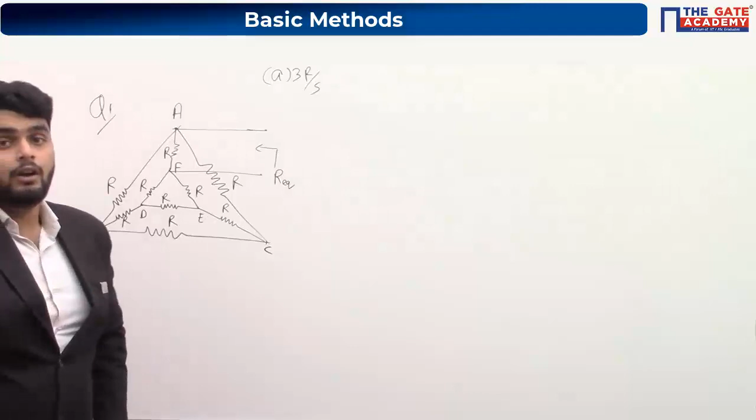In this question, we have to find out resistance between two terminals AF. One option of this is 3R by 5. Okay, fine. So we will solve this question. This is a question of symmetry. First of all, we have to check whether this question is of symmetry or not. For that, we have to draw either a vertical line or a horizontal line.

So I am drawing a vertical line, just as I have done earlier. This is a vertical line. Now you can see, with respect to this line, you will get a mirror image on this side as well as on this side. Yes or no? So that means this is a line of symmetry.

Next step is to identify the line of symmetry. For that, we have to draw the axis of symmetry. And what is the axis? The line connecting the terminals between which we have to find out the equivalent resistance, like this. This is F, this is A. Now you have seen that the axis and the line of symmetry are parallel to each other. That means this is a parallel line of symmetry.

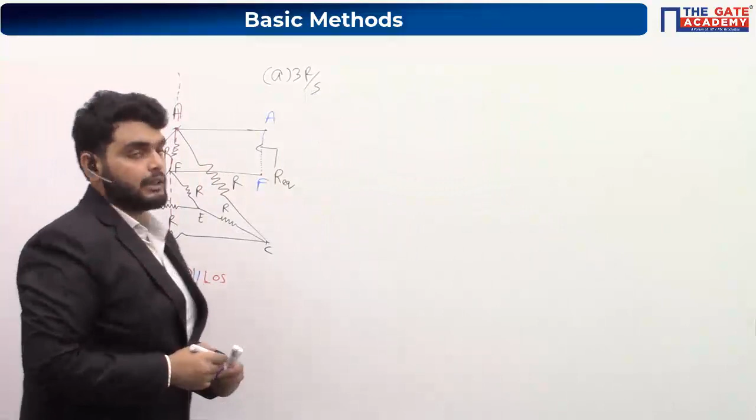Second step finished. Third step: for a parallel line of symmetry, the branches which are perpendicular to it contain equipotential points, and for a perpendicular line of symmetry, the branches which are parallel or on it contain equipotential points. Here this is a parallel line of symmetry, so branches perpendicular to it contain equipotential points. So tell me, what are the equipotential points here?

Okay, DE and BC. The branch DE and the branch BC are perpendicular to the line of symmetry. So D, E and B, C are equipotential points. Now I can either short circuit this branch or open circuit this branch. I am doing the open circuit, so open circuit the branches DE and BC.

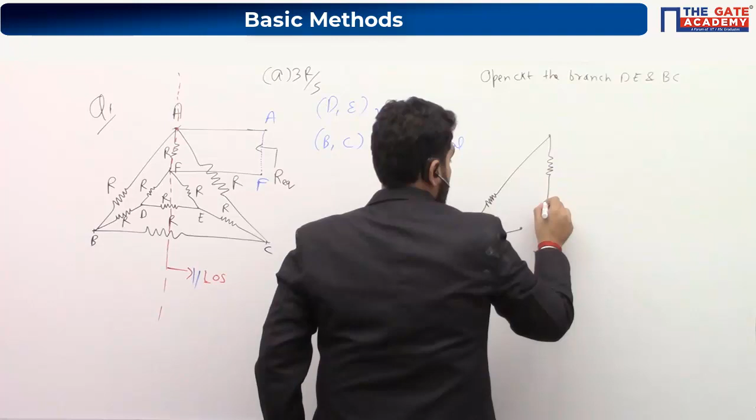I am open circuiting the branches DE and BC. The network will look like this. And this is the axis. This is F, this is A. Now we have to find out the equivalent resistance.

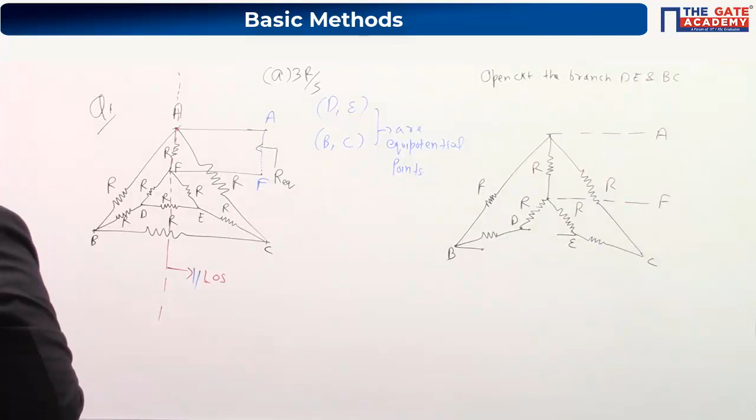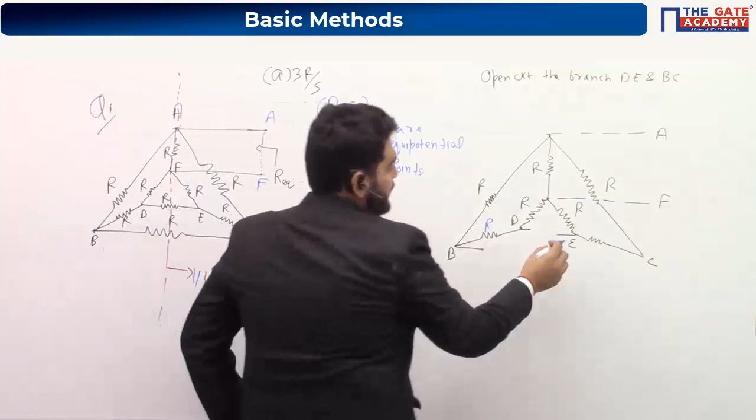You can see these three resistors are in series, right? Similarly, these three resistors are again in series. I have two points, one is A, one is F. These three resistors are in series, so I can write the sum as 3R. These three resistors are in series, so I can write 3R.

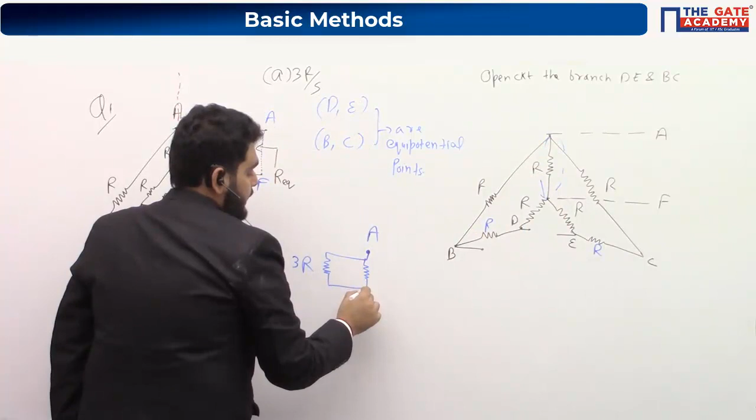Now see this middle resistor; it is between A and F, so again one resistor R, and the series branch again 3R. For resistance between AF, all resistors are parallel, so I can write 1 upon 3R plus 1 upon 3R plus 1 upon R. By solving this, you will get RAF equal to 3R divided by 5 ohm.

So students, this was the question I gave you in the homework in the last class. There was a doubt earlier from one student, I don't remember the name, that we can solve this question with star delta also.

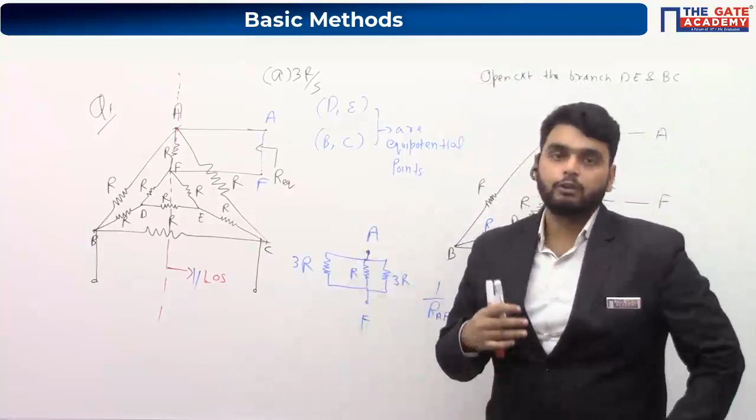So the question that we solved in the last class, resistance between DC, can be solved using the star delta transformation. But if you want to find out resistance between AF, like this question, then you cannot solve it using star delta. Because in star delta, the terminals across which you have to find out the resistance cannot be changed. What does it mean? I will explain it when we go to star delta. Right now we are completing our symmetry concept.

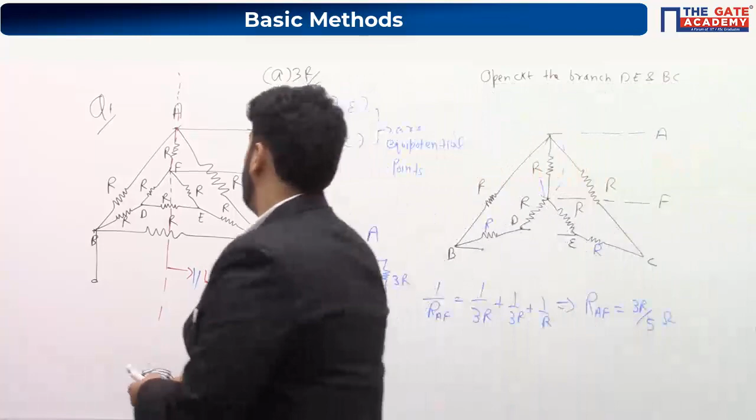So this was the question I gave in homework, and I also gave you one more question in homework. So tell me the answer of that question. Now try to solve this question. In this question, we have a network given and we have to find out voltage AB. This is node A, this is node B. And 1 ampere current is entering from node A. So in this, we have to find out voltage AB.

Carefully do this question from the start. Don't skip any step. Step 1, step 2, step 3, step 4. For every theorem, for every analysis, I will give you the steps. So whenever you practice questions, do all the steps. Even though you know, don't skip any step. In the exam, you can skip steps to save time. But during practice, don't skip any step. Otherwise, in the exam, you will get confused.

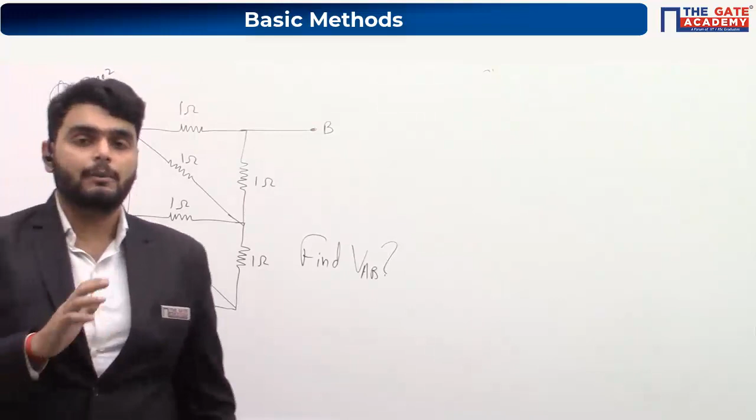So here, the first step was to see whether we can apply the symmetry concept, yes or no. So tell me, can we apply the symmetry concept here? We can or we cannot. Let's see. First of all, we have to draw the line of symmetry. Line of symmetry means a line which divides the network into two equal parts, or two mirror images. I can draw either a vertical line or a horizontal line. Both lines will divide the network into two mirror image parts.

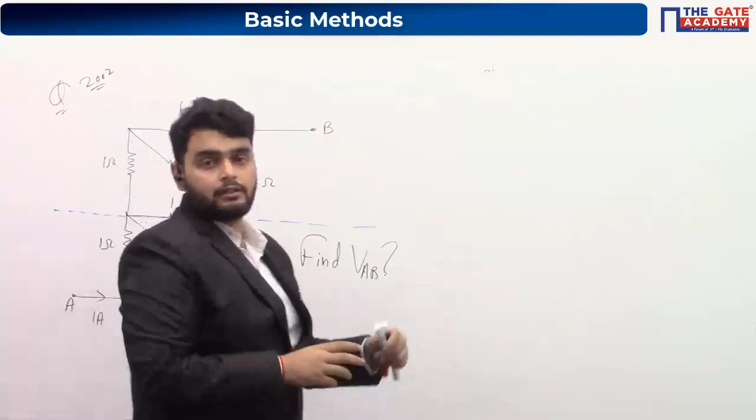I have drawn this network like this. Now see, above this line and below this line, we have a mirror image. So I can say this is our line of symmetry. First step complete. Now second step, we have to draw the axis of symmetry and identify the line of symmetry. It can be either parallel or perpendicular. Axis means we have to join the two terminals across which we have to find out the equivalent resistance.

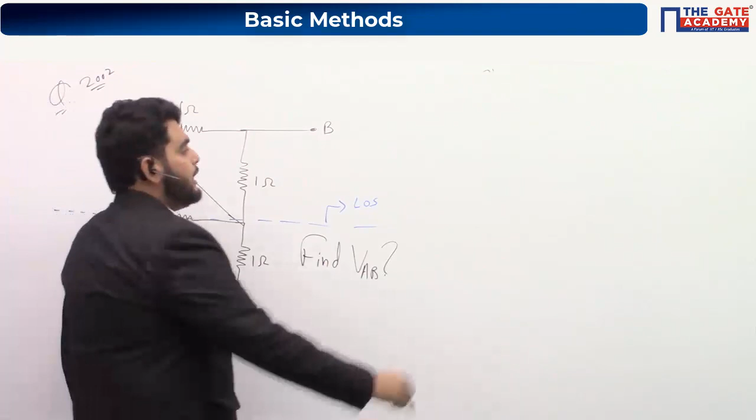See, the question was that we have to find out the voltage AB, and they have given you a current of 1 ampere. So if I know the resistance AB somehow, then voltage AB will be resistance AB multiplied by 1. That's why we are finding out resistance here. Otherwise, you have to divide that current in each and every branch by using KCL, then apply KVL, like the question we did in earlier classes. So to find voltage AB, we have to find out resistance between AB.

Now I am drawing the axis of the network. Like this. This is my axis of network. So tell me, what kind of line of symmetry is this? Parallel or perpendicular? Perpendicular, first option. Anyone else? Now, this is the mistake people generally make. Perpendicular, how can you say that this line is perpendicular? You can see there is some angle theta made between them. We cannot say this line is perpendicular. Next, neither perpendicular nor parallel. Correct.

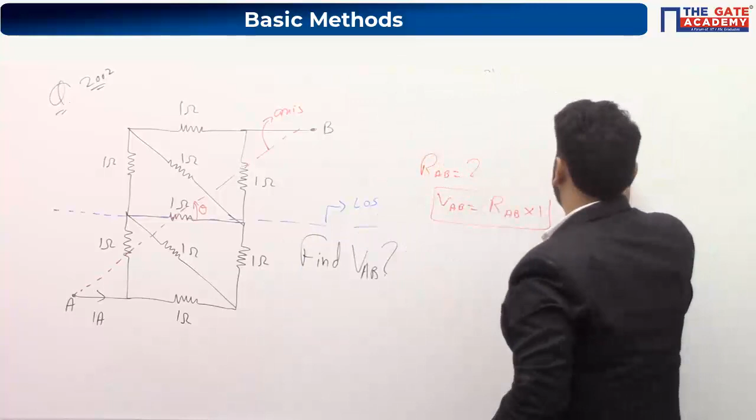See, the first point you have to remember in the symmetry concept: never change the configuration of the diagram given in a question. For example, some people will redraw the diagram like this somehow, and something above. They will make this point B and this point A, then combine the line and say this is perpendicular. So the first point, or I can say limitation, to apply symmetry: never change the configuration of the network given in a question.

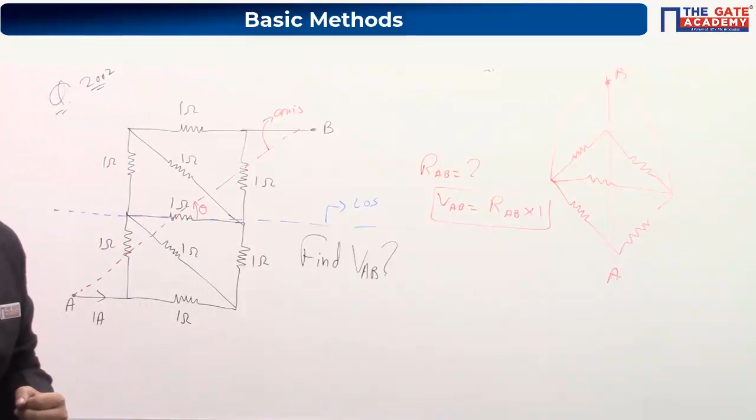And if I am not changing the configuration given in the question, then you can see this line of symmetry is neither perpendicular nor parallel to the axis of the network. So I can say this question cannot be solved using the symmetrical concept, because in the symmetrical concept we cannot change the configuration.

That is the limitation. That's why in practical life, like in a hospital, in a home, or in big industries, we cannot use this method, because in big industries, houses or hospitals the configuration is fixed. You cannot change the configuration, even if the network is symmetrical. For example, this network is symmetrical, no doubt.

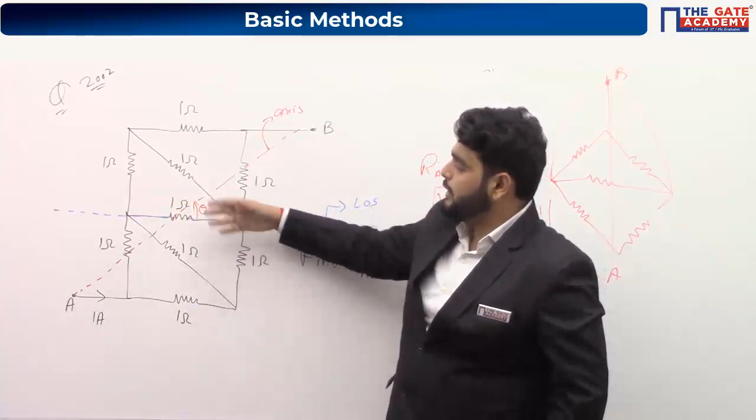Why is it symmetrical? Because by drawing the line of symmetry, two mirror images are coming. This network is symmetrical, no doubt. But because of the axis, we cannot get the line of symmetry. Okay? So this question cannot be solved using the symmetrical concept. The only method to solve this question is the star delta transformation. So when we do the star delta transformation, I will come again to this question.

Okay? So guys, remember this point. For applying the symmetry concept, never change the configuration. That's the first point to remember for symmetry. Second point to remember, we cannot apply symmetry twice in a network. For example, I'm applying symmetry one time, then I'm redrawing the network, then I'm again applying the symmetry concept or a symmetrical line. That will be wrong. We will never apply the symmetrical concept twice in the same question.

Okay, got it? Third important point, if we change the axis, the equipotential points will change. For example, in the last class we did one question like this one. I am again drawing this question. This was A, this was B, this was C, D, E, F. So in our last class, the axis was AF, which means we had to find out the resistance across AF.

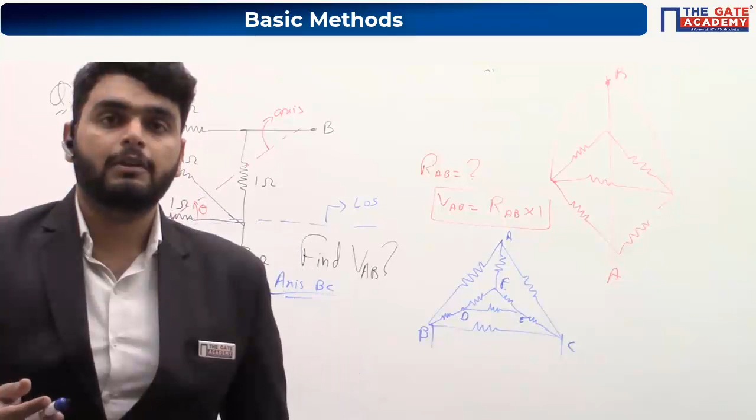For the BC axis, tell me what were the equipotential points? I'm changing this. This was F, this is D, this is E. So tell me, for axis BC, what were the equipotential points? Tell me quickly. AF, correct. So in our last lecture, we have seen that for BC, the equipotential points were AF.

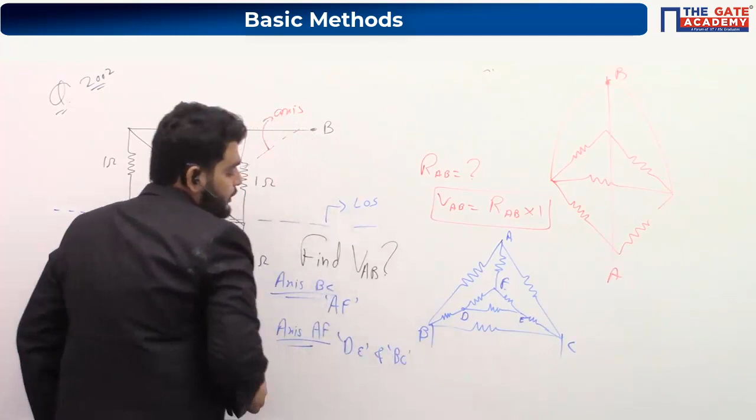Now, in today's class, we have seen the axis AF. When the axis is AF, what were the equipotential points? DE and BC. So you can say the network is the same, but the equipotential points are changing. Why? Because equipotential points depend on the axis of a network. Remember this point. But equipotential points are independent of the line of symmetry.

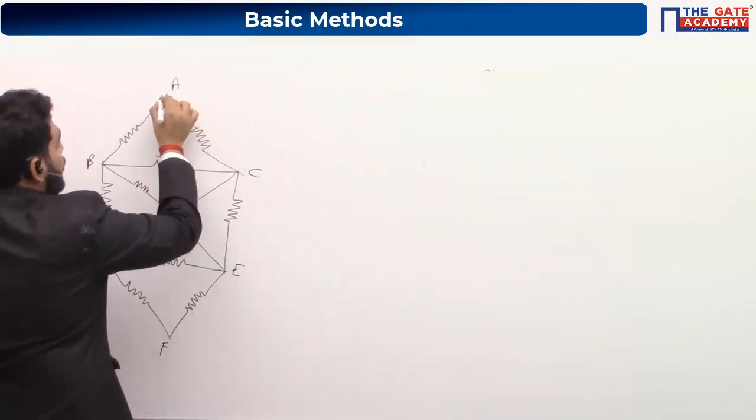What does it mean? It means you can draw either a perpendicular line of symmetry or a parallel line of symmetry; for a particular axis, the equipotential points remain the same. The same thing we have seen earlier. For example, I'm again drawing one question that I gave you in homework, this one. And right now, I'm fixing my axis as AF. Between AF, we have to find out the resistance. So, for AF, this network.

For this network, I can draw a vertical line so that this is a line of symmetry, or I can also draw a horizontal line. This is also a line of symmetry. So you can see, if I'm talking about this blue line of symmetry, this is a parallel line of symmetry because it is parallel to the axis. If I talk about this red one, this is a perpendicular line of symmetry. Okay, I have drawn both lines of symmetry, parallel and perpendicular.

Now see, for the parallel line of symmetry, what are the equipotential points? For a parallel line of symmetry, look at the branches which are perpendicular to it. For this parallel line of symmetry, branches BC and DE are perpendicular to it. So for this, the equipotential points are BC and DE. These are the equipotential pairs, right?

Now for the perpendicular line of symmetry, the branches which are parallel to it contain equipotential points. The branches which are parallel to it are BC and DE. So again, the equipotential points are BC and DE. So equipotential points depend on the axis. They do not depend on the type of line of symmetry. For a particular axis, the equipotential points remain the same.

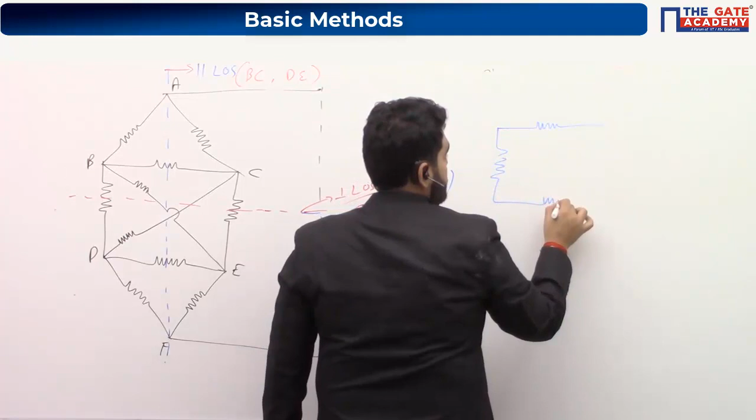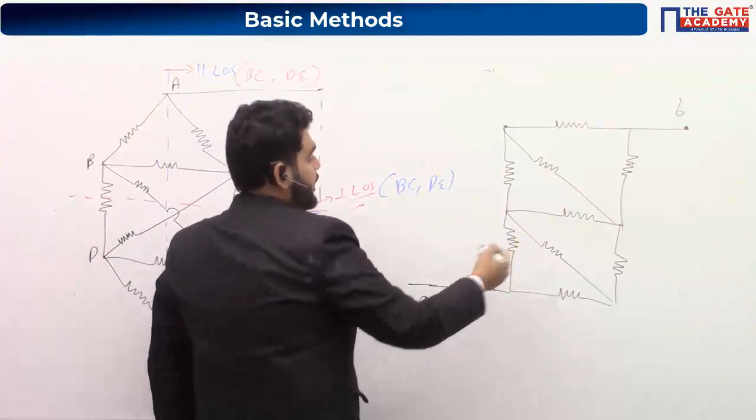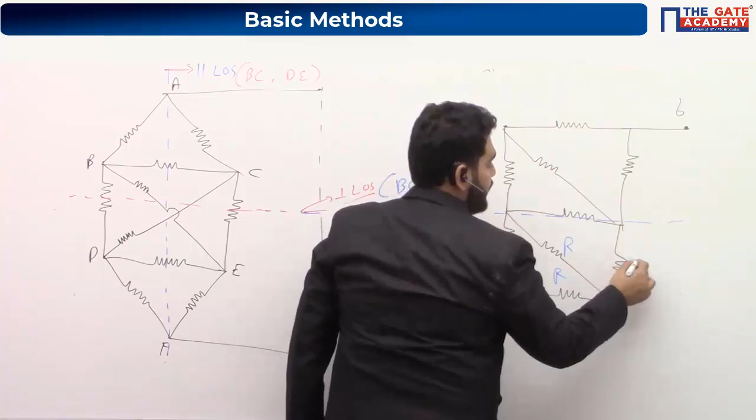Are you referring to this question or some other question? You are saying that they were not the mirror image of each other. Why not? They are mirror images of each other. I am drawing a line in the middle of it. So you can see the same configuration above the line and the same configuration below the line, and the values of all resistors are equal, like this. That's why this network is a symmetrical network.

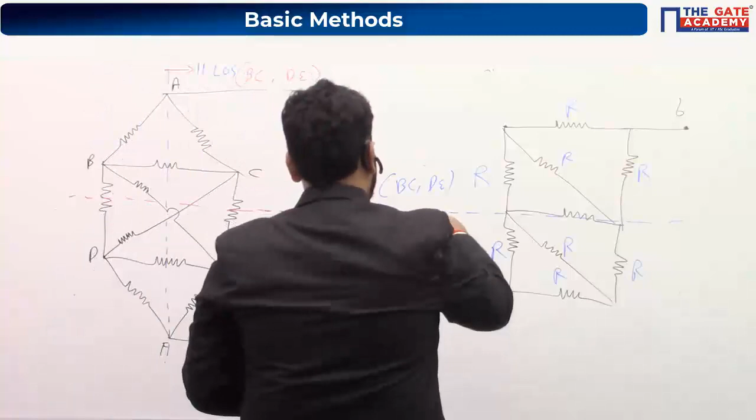You can see this is a line of symmetry, but if I draw the axis, that axis is not giving me any parallel or perpendicular axis. That's why we cannot solve this using the symmetrical concept, because we have only two types of line of symmetry, parallel or perpendicular. Okay, fine. So this was a question on the line of symmetry, and this topic is important for this year because I feel that they will ask you a question on symmetry.

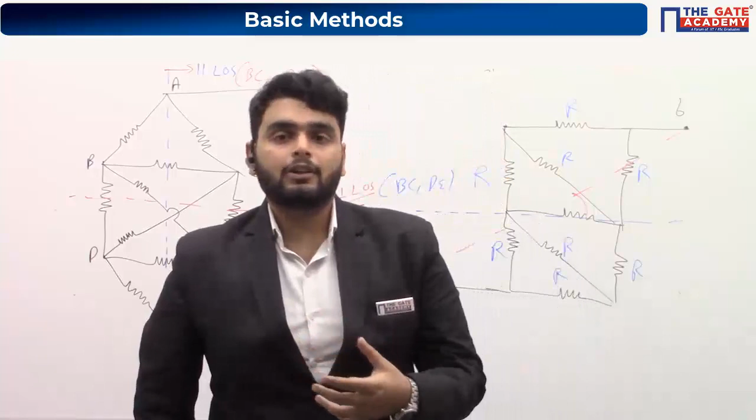Fine. Now we will go to one more small topic about 3D figures: how to find out the resistance or total component or inductance, anything, for a 3D figure. A 3D figure is like a cuboid. Okay, those are practical life figures. Now the case is a 3D figure. So before directly going to the 3D figure, I will explain some concepts. Then we will see the 3D figure.

So for the 2D figures that we have seen in 2 or 3 questions, what have we done? We drew the line of symmetry and axis of symmetry and then proceeded that way. So for a 2D figure, we used the line of symmetry. But for the 3D figure, we use the plane of symmetry. But using the plane of symmetry is a typical method, plus it is a lengthy method. And moreover, this method is not in your GATE syllabus, nor for the other government exams. That's why we will not do the plane of symmetry.

We will do it by using the concept of equipotential points. In line of symmetry also, we found the equipotential points and then redrew the network. Here, we will also find the equipotential points and then redraw the network in such a way that the 3D figure converts into a 2D figure. But here, the procedure of finding equipotential points will be different compared to a 2D figure. So before explaining the procedure, see one thing.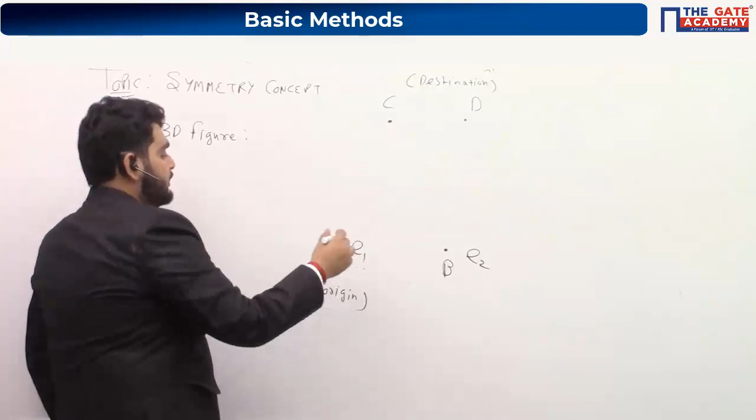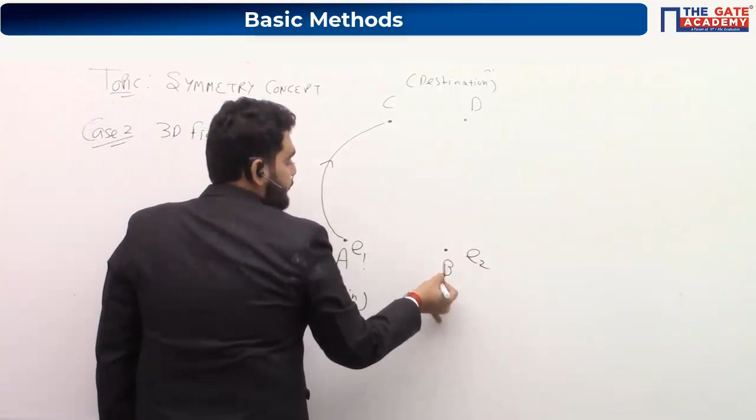Let us suppose I have two points A and B, and two more points C and D. These two points are origins, these two points are destinations. Got it? I have an electron. This is me, one electron; this is my friend, a second electron. The work of an electron is to go from one origin point to one destination point. So suppose this electron goes from A to C, and it uses some amount of energy, J1. Similarly, my friend at point B goes from B to point C, and again uses energy J1.

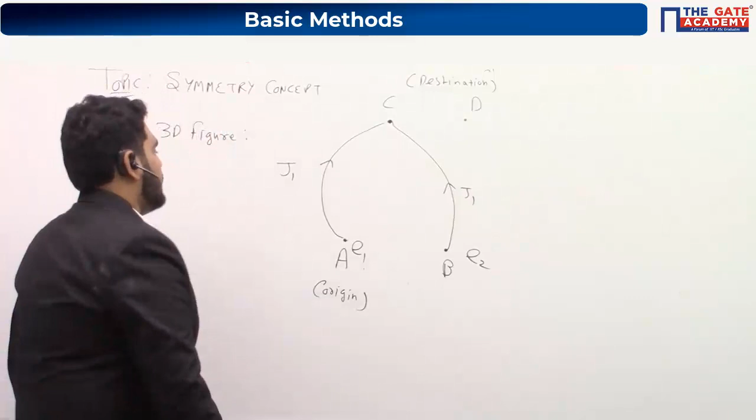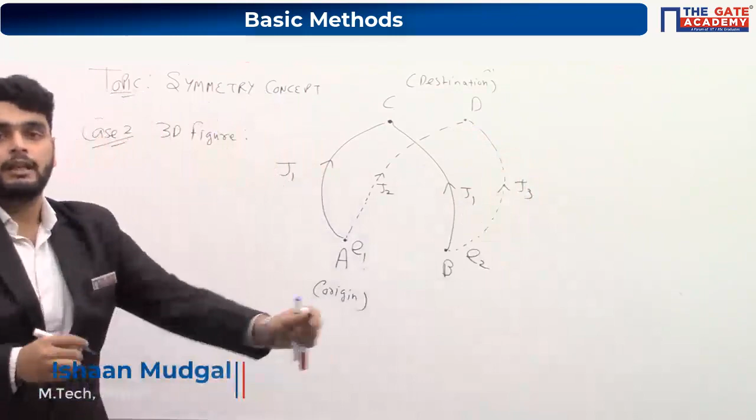Now, after some days, electron 1 goes from A to D using energy J2, but the electron from B goes to D using a different energy J3. What does it mean? An electron going to point C from A and from B uses the same amount of energy. But for going to D, it uses different amounts of energy: A uses J2, B uses J3. It means if I choose any different point, again there will be a difference in energy from point A and from point B.

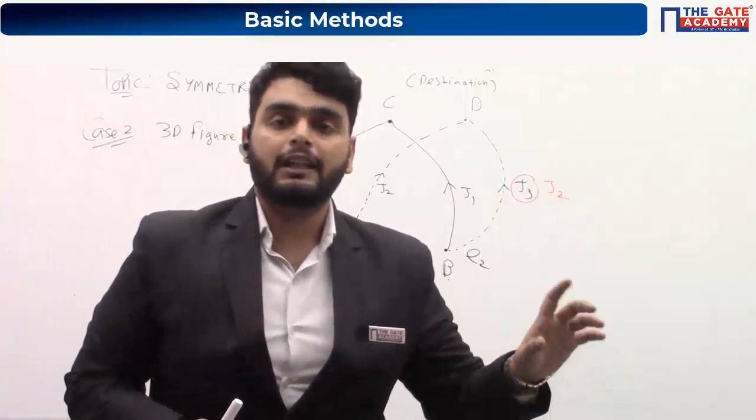So if there is a difference in the energy taken, then these points are not equipotential points. What did I say? See, if the energy taken by an electron going from an origin to a destination point is equal, if the energy taken by an electron from different origin points to a different destination point is equal, then those origin points are equipotential points.

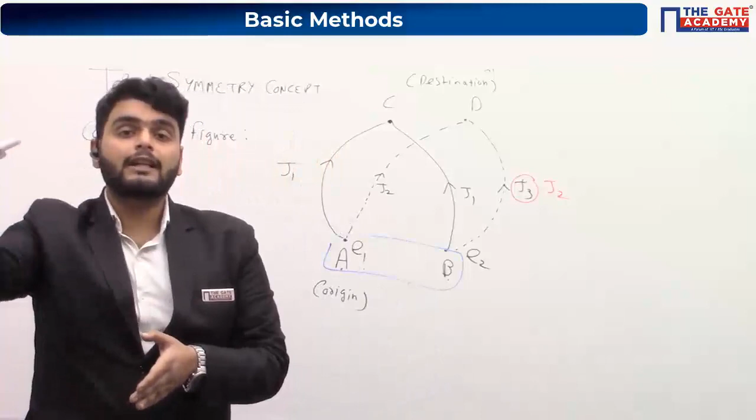Means you are using the same amount of energy, either you are going from A or you are going from B. And also it is not depending on the destination. Means it's not depending on whether you are going to C or D. You are using the same amount of energy to reach either C or D from point A or B. So if this condition is satisfied, then we can say that A and B are equipotential points. And if they are equipotential points, we can either short circuit or open circuit them.

So in this 3D figure, we use the concept of resistance as a distance. We will assume that the resistance taken by an electron to reach a particular point is equal to the distance taken by the electron to reach that point. And if the distance taken from two positions to a particular point is the same, then they will be equipotential points. Okay, so see, the concept is simple. Just remember one thing, we will assume that resistance is nothing but the distance taken by an electron.

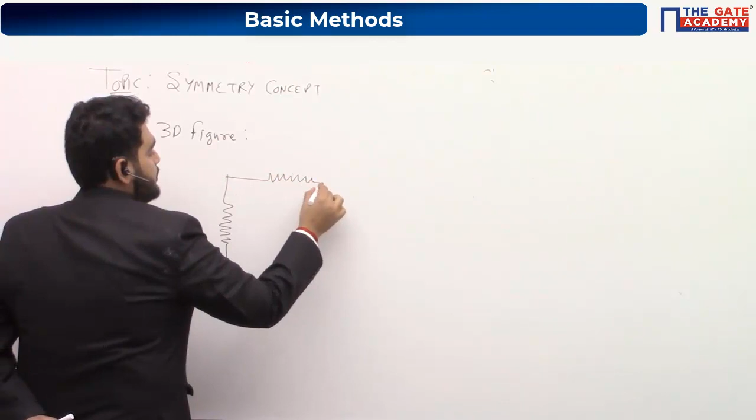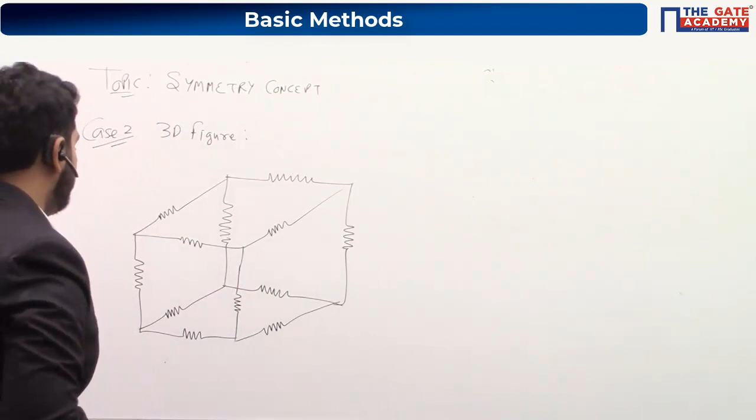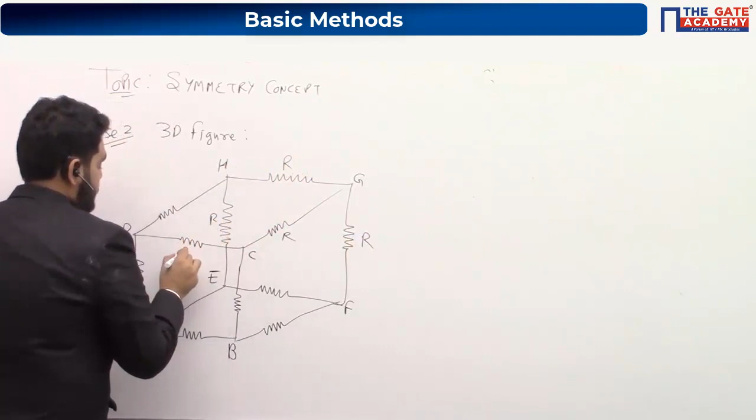Okay, so first of all, I am drawing one 3D figure. And for the 3D figure right now, I am drawing a cube. Okay, so I have a cube. These are points A, B, C, D, E, F, G, H, and all resistors are equal.

Now, in this, three types of question can come. The first type of question: find out the total resistance between adjacent nodes. Adjacent nodes, you can take any two nodes which are adjacent. I can take AB, or I can take BF, or I can take CG, any points. So here, first we have to find out the resistance between AB. Okay, this adjacent node.

Second, total resistance between the diagonal of a face. So in a cube, we have 6 faces: front, back, top, bottom, and 2 side faces. So out of 6 faces, I can choose any diagonal. Why? Because it is a symmetrical image. You can see from this side, or from top or below. The image is symmetrical, so you can choose either face. So let us suppose I am choosing the front face. So for the front face, we have to find out the resistance between AC.

Third question is total resistance between the diagonal of a cube. See, the first point was the diagonal of a face. The next is the diagonal of a cube. The diagonal of a cube is what? Just like from point A to point G, or from point H to point B. So here I am taking only one diagonal, which is AG. So we have to solve these three types of question. How to solve these questions, we are going to see.

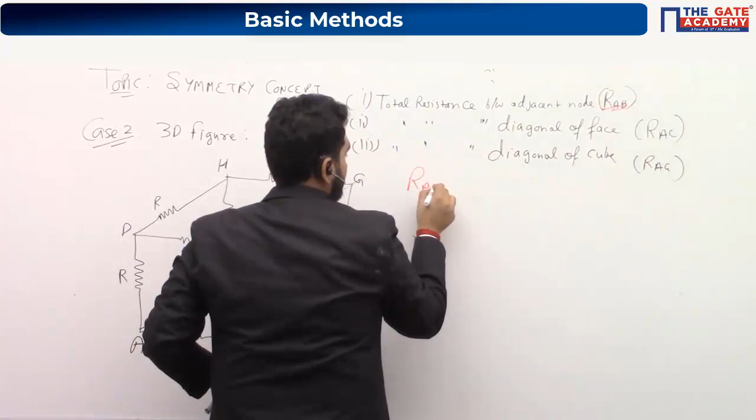So first of all, I told you to assume the resistance as a distance. Okay. So the first question we are going to solve: we have to find the resistance AB. To find the resistance in a 3D figure, we have to draw one table. What is the table? In the table, the first row contains the points between which you have to find the resistance. And then there are the remaining points: C, D, E, F, G, H.

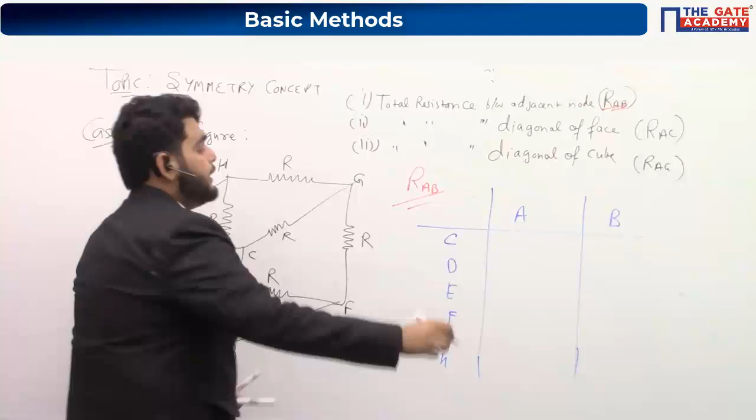Now you have to calculate the shortest distance taken by an electron to move from points A and B to these points. Okay, got it? So see, first I am talking about point C and the shortest distance taken by the electron, because if I am going from A to C, I have many ways. I can go A, E, F, G and C, or I can go A, B, C, right?

But we have to choose the shortest distance. So see here, and one more point. Never take a distance like this, that I am going in a diagonal form, because electron cannot flow in air. Electron can only flow in a wire. So this cube actually contains wires, right? So electron can only flow in a wire. They cannot flow in air. That you can say root 2 times of side, right?

So I am going from A to C. So the shortest distance will be, I can go from A to D and then C, or I can go from A to B and then C. Both are equal. So you can see this is R, this is R, 2R. It means I have to take 2R unit distance to reach C. Okay. Again I am telling you, assume resistance as a distance. So how much distance? 2R. From B, the shortest distance to reach C is R.

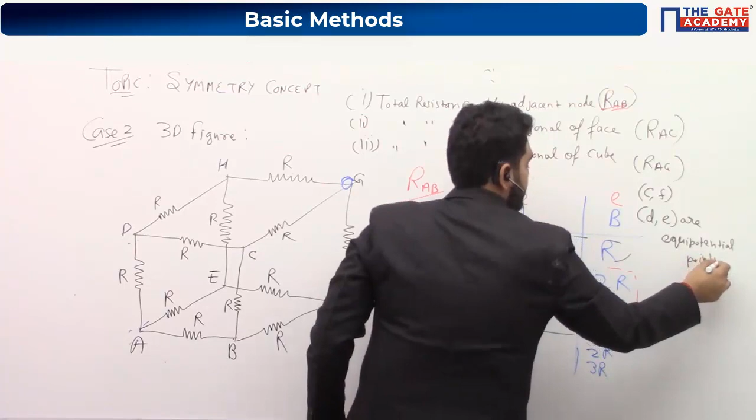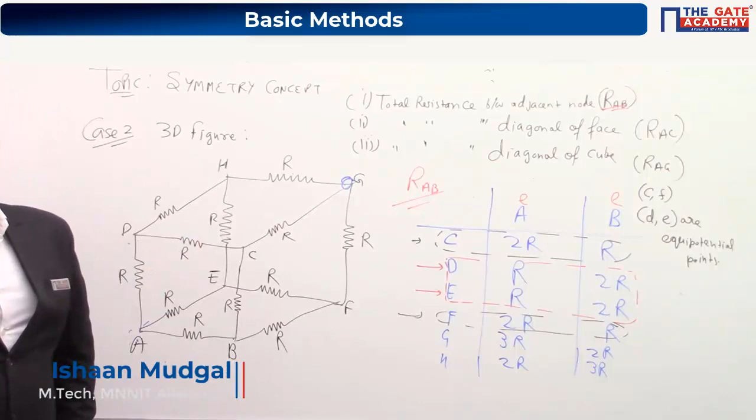So students, in a 2D figure, we use the line of symmetry to find out the equipotential points. But here, we use the resistance as a distance method to find out the equipotential points. Okay, in both methods, 2D and this 3D, the main objective is to find out the equipotential points. So we have found the equipotential points here, two pairs. Now, the next step is to redraw the diagram.

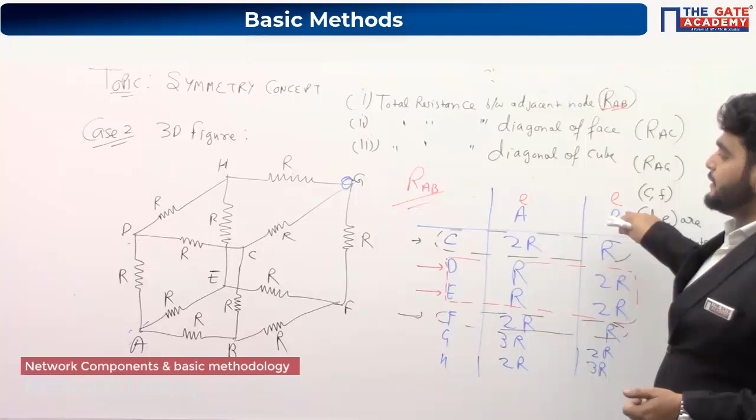Now, in redrawing the diagram, we can either open circuit or short circuit the branch, right? Now see here, DE and CF are both pairs of equipotential points. And you can see there is not any branch present between them. It means I can assume they are actually open circuit. So if they are already in an open circuit and the network is in complex form, now I can only short circuit these 2 points.

Okay, they are already open circuit in the given network, but the network is in a complex form. So now I can only short circuit these points. And what is the meaning of short circuit in symmetry? I told you, if 2 points are short circuited, bring the 2 points together and make them one point. Okay, so now we will redraw the diagram.

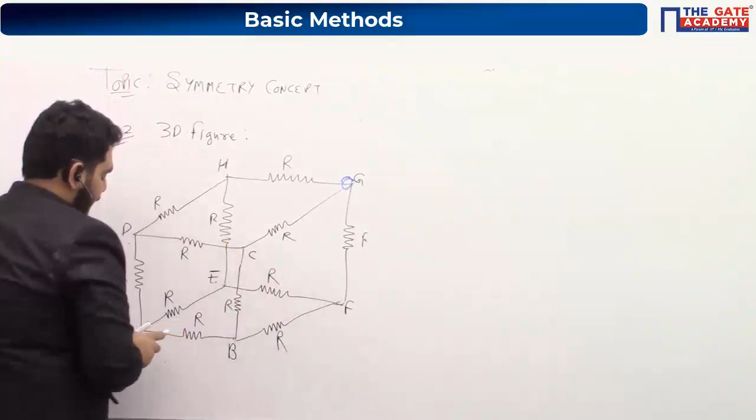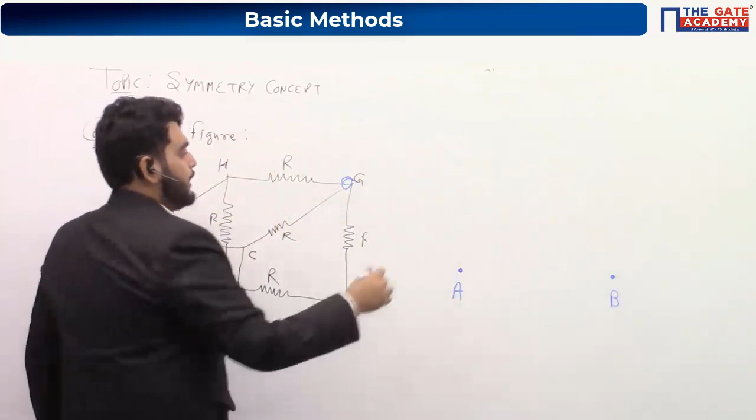So see carefully. D, E and C, F are equipotential points. So what I am doing, first I have taken the point A and the point B between which we have to find the resistance. Now D, E, I am taking as one point and the name of this point is D comma E. Here also I took one point and the name is C, F, because I have short circuited these two points, and short circuit means bringing the two nodes and making it one node. And the remaining points are, you can put here H, you can put here G.

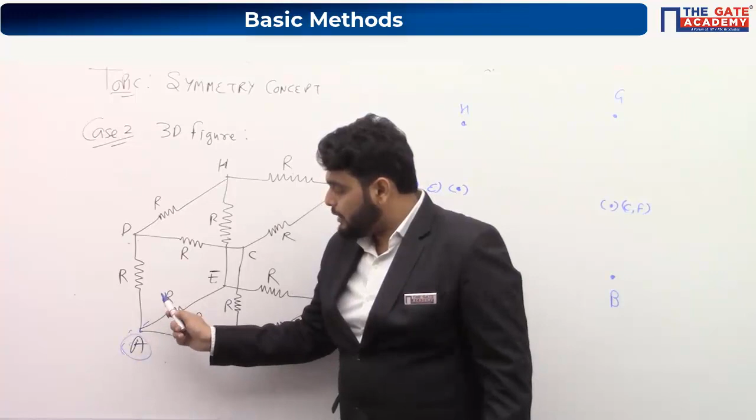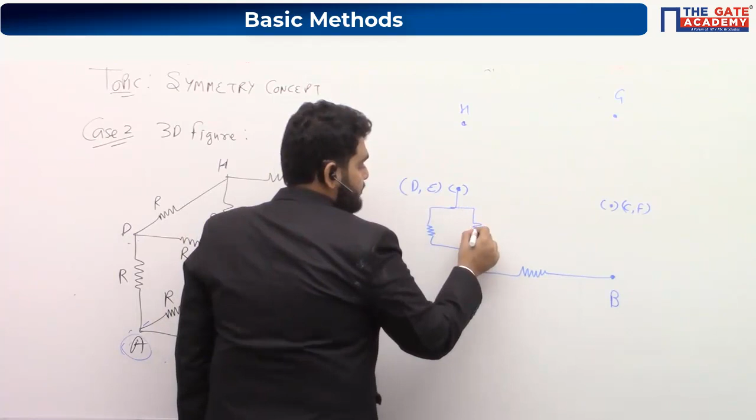Okay. Now we have to draw all the resistances here. So see here and carefully draw the resistances. Don't leave any branch, otherwise the whole question will be wrong. So you can see from node A, I have 3 branches: 1 towards E, 1 towards D, 1 towards B. So from A, I have 1 branch to B, 1 branch to D, and 1 branch to E. Like this, 3 resistors, which means this one is complete.

From D, I have 1 branch to C and 1 branch to H. It means these 2 are complete. From H, I have 1 towards G and 1 towards E. Both points are same, that's why it will be parallel. So this one is also complete. From G again, I have 1 towards C and 1 towards F. Like this. Now you can see from B, I have 1 towards C and 1 towards F.

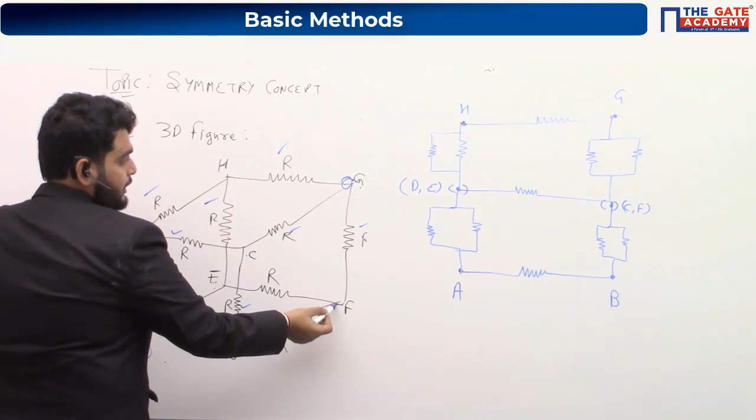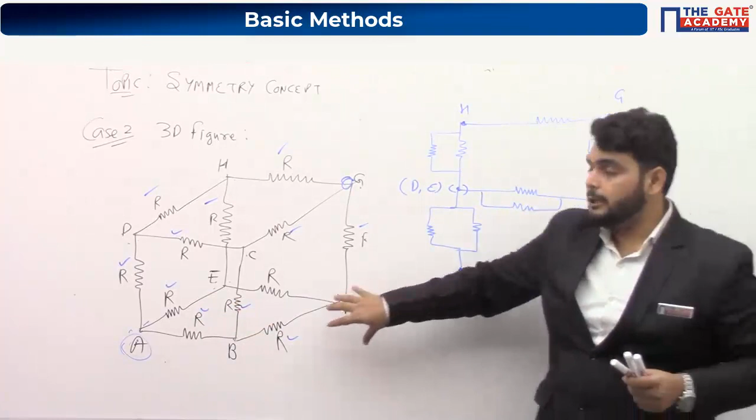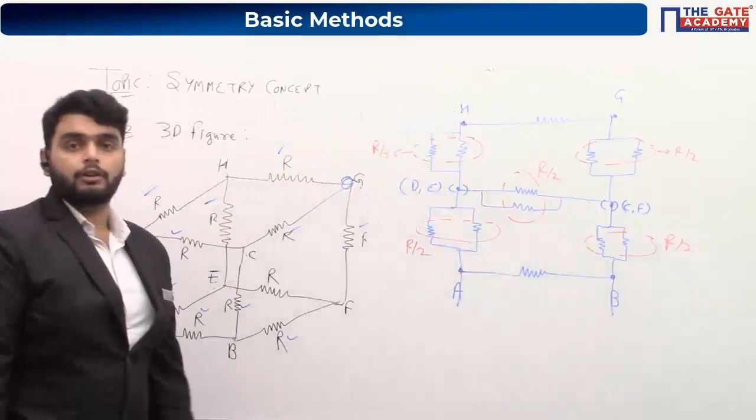Okay. So we have seen that this was a 3D figure, but we have changed this 3D figure into a 2D figure. We cannot calculate resistance directly in a 3D figure. We have changed it into a 2D figure. Now we can solve this, and this is a simpler one. You can see these two are in parallel, so it becomes R by 2. This is also parallel, this becomes R by 2. R by 2, R by 2. Right? Now this R by 2, this R and this R by 2 are in series. So R by 2 plus R plus R by 2 gives you 2R.

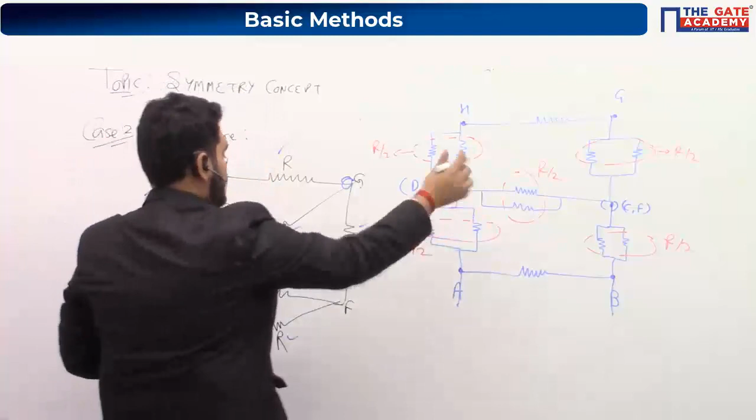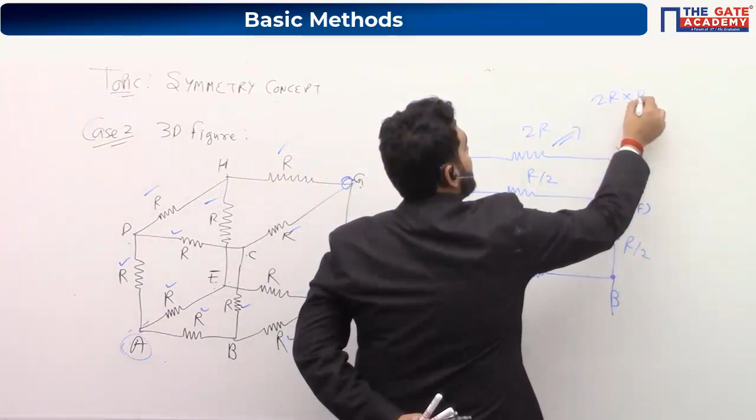Similarly, I will draw the network again. This becomes 2R. This becomes R by 2. This also becomes R by 2. This also becomes R by 2. Now 2R and R by 2 are in parallel. So if these are in parallel, you can write 2R multiplied by R by 2 upon 2R plus R by 2. So we can solve it: 2R divided by 5. So the parallel combination will give you 2R divided by 5.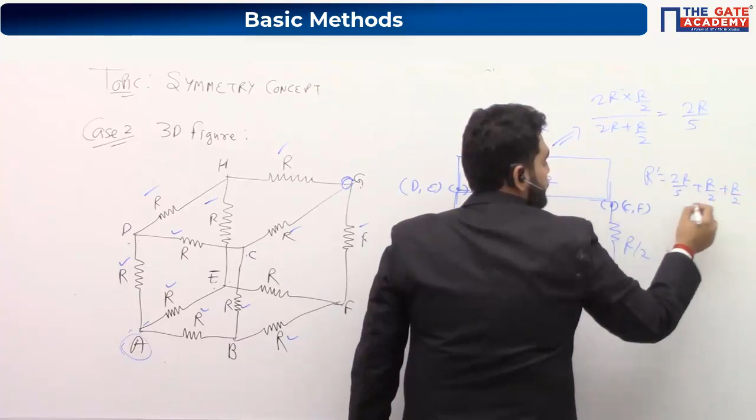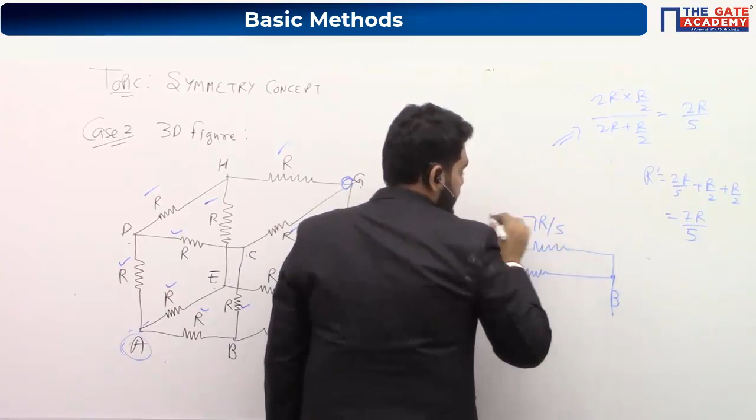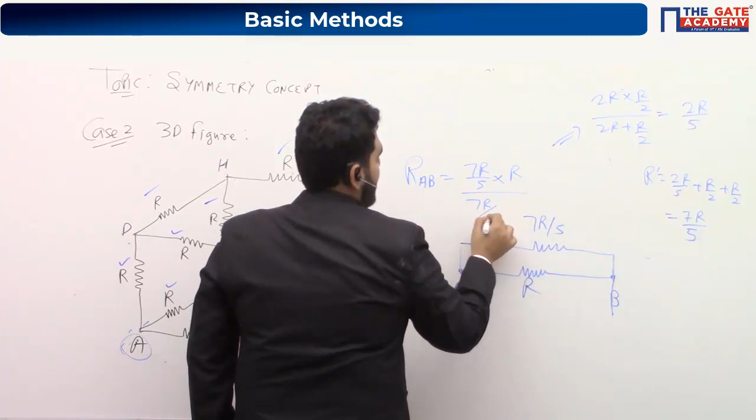Right? So then 2R by 5, this R by 2, this R by 2 are in series. So I can write R dash is equal to 2R by 5 plus R by 2 plus R by 2. It will give you 7R by 5. Check the calculation also. It means now the network is simplified into this: 7R by 5, and this is R. Now you can simply write R AB is equal to 7R by 5 multiplied by R upon 7R by 5 plus R. It will give you 7R by 12. This is the answer.

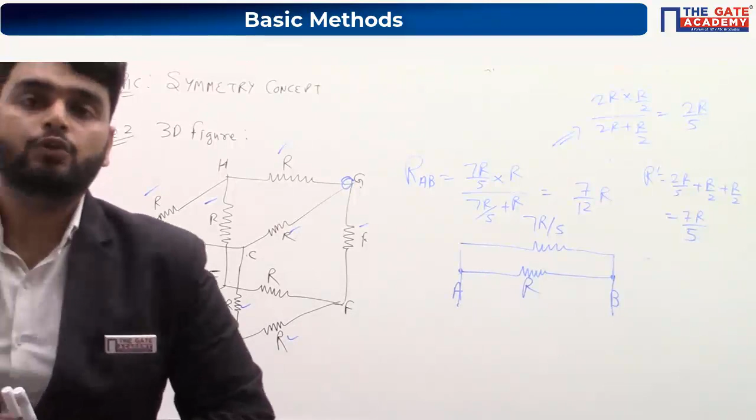So here we didn't use the plane of symmetry. We just take resistance as a distance and find out the equipotential points, and then we just have to redraw the network. Okay, got it? Yes or no?